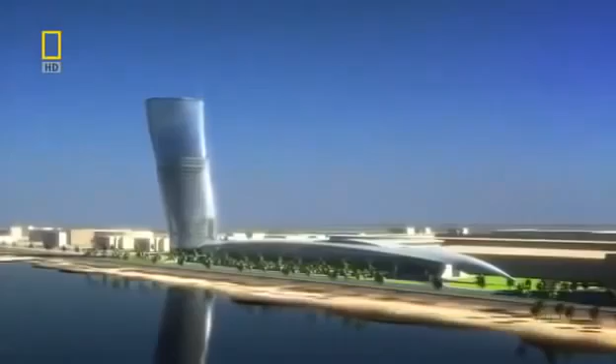The team come up with an extraordinary design. A tower that spirals out of the ground to 160 meters. Inspired by a desert whirlwind and the splash of a wave rising over the sand. This gravity-defying skyscraper tilts almost 5 times more than Italy's Leaning Tower of Pisa. No single angle of this tower is the same as another. It's a structure guaranteed to amaze.

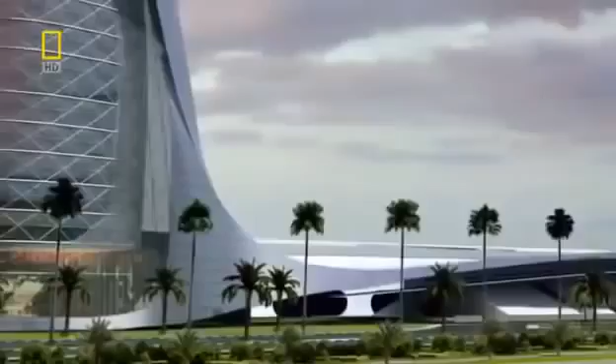We really wanted this to happen. They could see a vision suddenly. They could see something that would stand for them. Then there was no stopping us. Sheikh Sultan wants the lower floors to become the most prestigious office address in Abu Dhabi, with the top 18 levels assigned as a 5-star hotel fit for royalty.

But for maximum impact, this landmark skyscraper also needs a prestigious location. The Sheikh decides the tower will stand next to a monument of national importance, the Grandstand. Built by his uncle and founding father of the United Arab Emirates, Sheikh Zayed, it's used to this day for national celebrations. This monument and the skyscraper will link Abu Dhabi's future with its past.

Over the past 50 years, this land has experienced extreme change like no other. The discovery of huge oil reserves in 1958 set the wheels of progress in motion. Abu Dhabi's ruler, Sheikh Zayed, had a vision. To unify the sheikhdoms and secure their financial future from Western dominance. He then set about using his black gold to create a city that rose out of the desert.

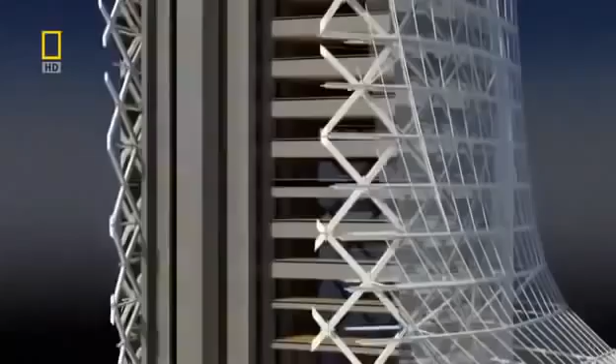To make Capital Gate's gravity-defying design a reality, it'll take some extraordinary engineering, and the challenge begins on day one. Its top floors overhang its base by 33 meters, creating huge forces that want to rip the building's foundations out of the ground.

At the construction site, project architect Tony Archibald is daunted by the task ahead. When I first joined the job, I was shown the drawings, and I kind of did a double take, and I wasn't quite sure that I got the correct understanding of the project, and it took me a few moments before I realized what we were about to undertake.

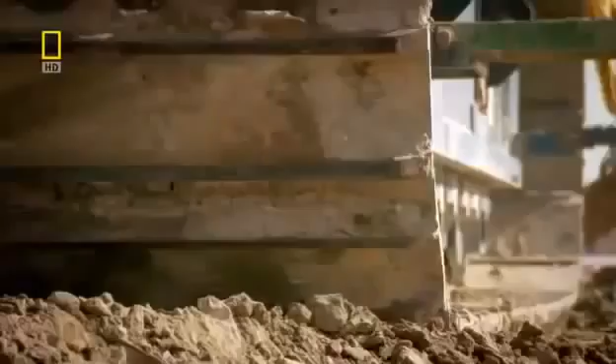Keeping Capital Gate upright is a huge engineering challenge. There isn't just one solution. To overcome the forces of gravity, it will take a whole range of pioneering techniques. But the task starts with the foundations deep underground. On one side of the building, the weight is going down into the ground. On the other side, it's being lifted out of the ground. And that's due to the large overhang that we're having to deal with.

The solution requires almost 400 concrete piles that work in 2 different ways. On the leaning side, half of the piles push the overhang's forces into the ground. On the opposite side, the remaining piles anchor deeper into the bedrock. They resist the stretching forces trying to wrench the building out of the ground.

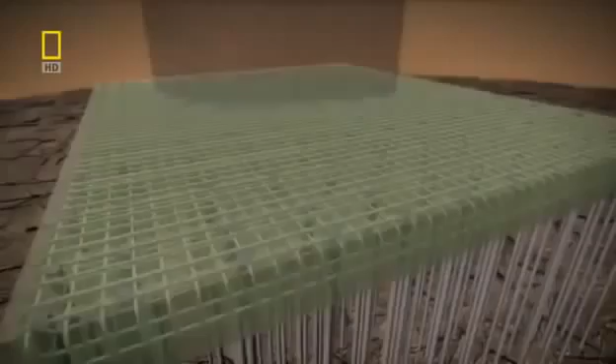Finally, to evenly distribute Capital Gate's forces into the piles, a deep concrete slab reinforced with steel is laid on top. What the foundations taught us is that every single aspect of this building has to be custom engineered.

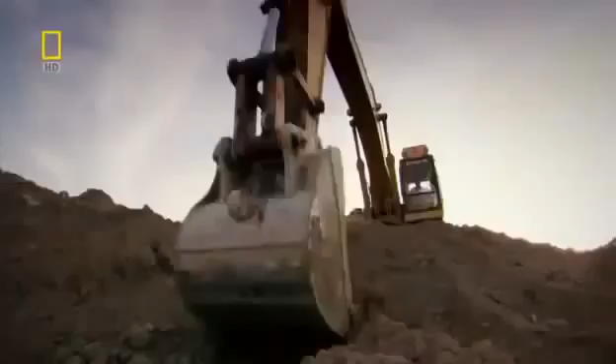Excavators dig out a colossal 6,000 cubic meters of sand. And over 8 weeks, hundreds of piles are driven into the ground. We had an awful lot of piles to put in a very close proximity. It was a real difficult challenge. There can be no let-up on this schedule. Sheikh Sultan wants Capital Gate complete by an impossibly tight deadline.

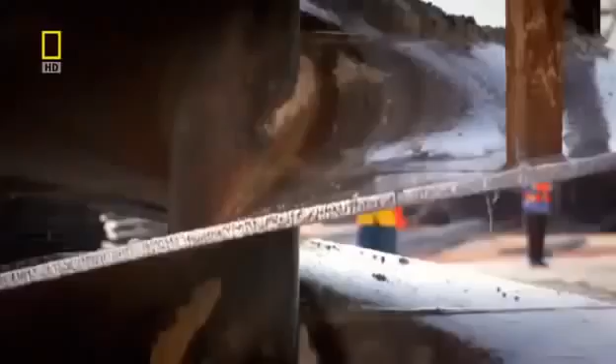With the foundations finished, building above ground can begin. But because of the dramatic lean, it will have to be constructed in a very different way to a conventional skyscraper. We realized once we'd done the foundations that this was going to be the first of many difficult problems. A normal skyscraper requires a solid core to hold it upright. But Capital Gate's curves will just crack and topple a standard core. Engineers must discard conventional thinking and devise a way to defy gravity.

Inspired by the nearby desert landscape and its wind-shaped dunes, architects have designed a curved leaning tower. But it'll take some audacious engineering to stop Capital Gate from falling over. Normal skyscrapers are built around a slim vertical core, which helps to channel the building's weight into the ground. There's so much overhang on this building that a conventional core, there was no way it was going to work. You just can't build a straight core. It's just not strong enough.

Capital Gate's design would cause a conventional core to bend dangerously. The pull of the massive overhang wants to stretch the core on one side, causing the concrete to tear apart.

Structural engineer Mona Vassi knows it's a serious problem that must be solved. When I saw this one, I thought it's impossible, it's not going to work. It's just some sketch, somebody left it somewhere. But I always think that for the architects, it's easier for them to just draw something, but it's not easy for us to fulfill or satisfy their need.

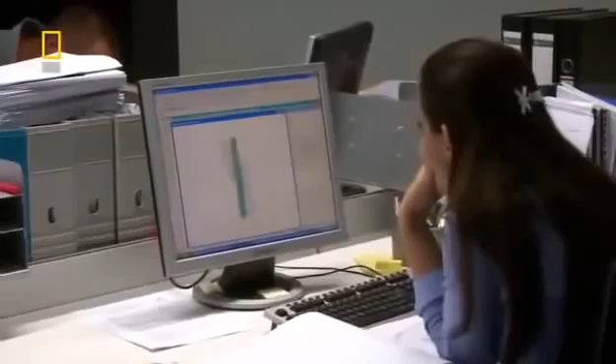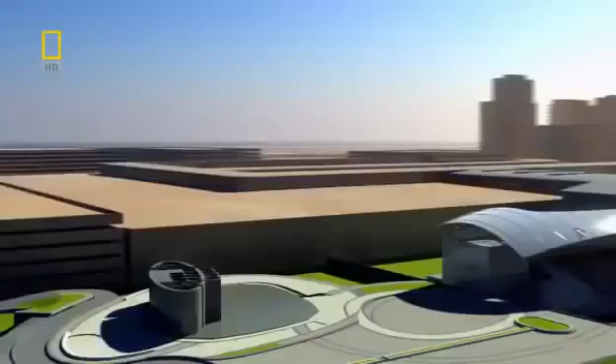The engineers developed two groundbreaking solutions. The first part of their plan is to build the core with a curve, bending in the opposite direction to the building's lean. As the structure grows, its weight pulls the core straight. In total, it shifts 350 millimeters, and the effect is significant.

The concrete that would have been stretched by the overhang's pull will now be compressed and strengthened. You build it bent, and then as you add the slabs to the upper levels, it pulls it back into vertical. So basically that whole vertical core is in compression, and that gives it immense strength.

The core grows 4 meters a week, and construction manager Les Fairchild is in charge of building it. This is probably the most complex core that I've come across. It's built at an angle, and effectively the core holds the whole building up. The core is built using a technique called jump forming.

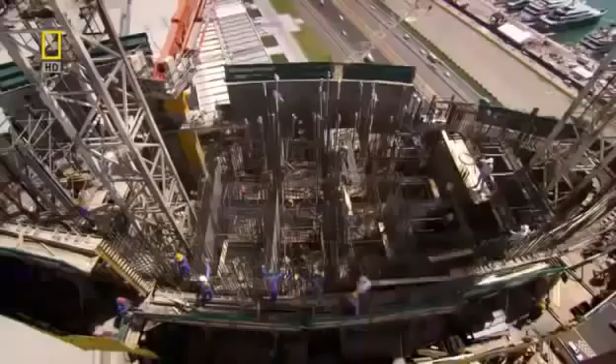First, a dense mesh of steel reinforcement is assembled. A mold then closes around the steel to form the shape of the core. The steel mesh is then filled with concrete. Then the mold or form can climb up the core wall for the process to start all over again.

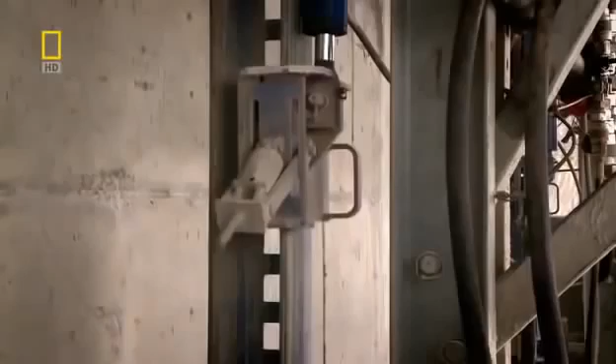Jump form is a hydraulic platform. Once we've cast each 4-metre level, we simply attach it to some runners and we jump it hydraulically up to the next level. The core will be strengthened as it straightens. But for the core to carry extreme loads, the concrete must be reinforced using steel rods called rebar.

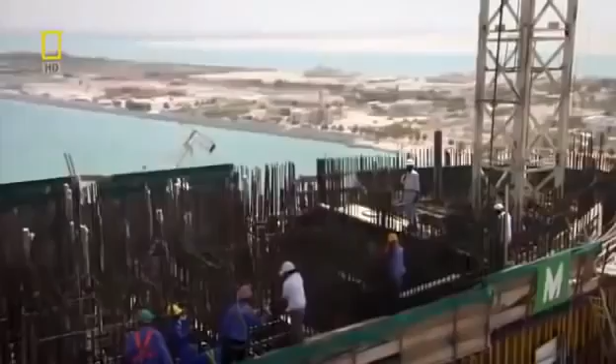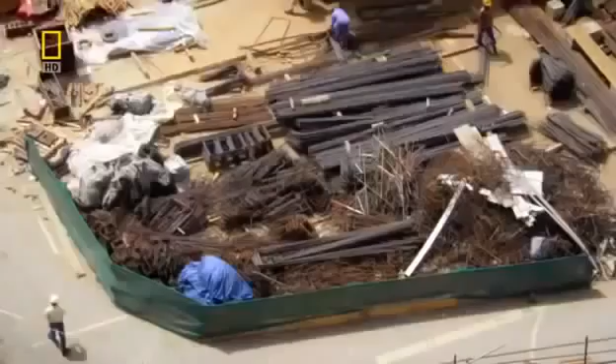The rebar is installed during the daytime, but temperatures of up to 50 degrees Celsius and concrete don't mix. It dries too fast and could crack. To set at the right speed, the concrete has to be poured during the cool of the night. As the core grows higher, the liquid concrete has to be pumped over longer and longer distances. So the consistency of every batch is first checked in a slump test to ensure it won't block the pipes.

When you first see it coming out the wagon, you can usually tell whether it's a tight mix or whether it's a loose mix, and that's what we're testing for really in the slump test. We simply make a cone, lift the cone off, and depending on how much it reduces in height, it tells you exactly what the slump is. The one we just witnessed is 215 millimetres, which is within the specification, so that's good to go.

Whilst the truck drives to the pump, Fairchild needs to get onto the core. He can take the stairs, but 90 meters up is a long climb. He knows a much faster way. Crane lift.

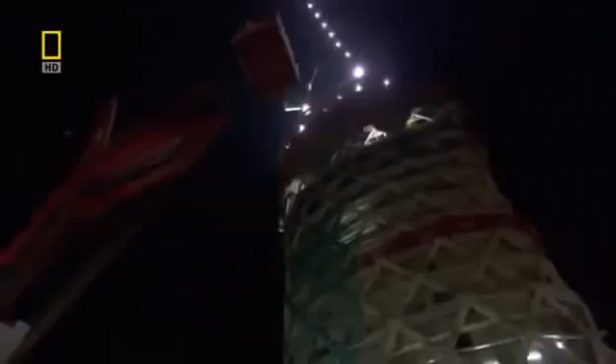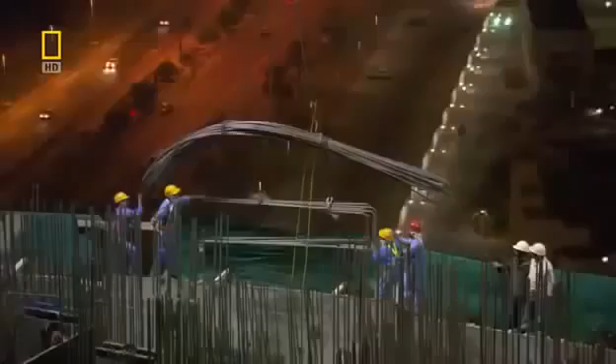It's going fairly well. We've had a nice continuous supply of concrete and we're now pumping it up to the upper levels of the building. And the lads are just steadily working away. They actually work from one side to the other in metre deep layers, so they're doing everything right. It's always exciting when we pour concrete. It means it's another achievement really. We're going up another level.

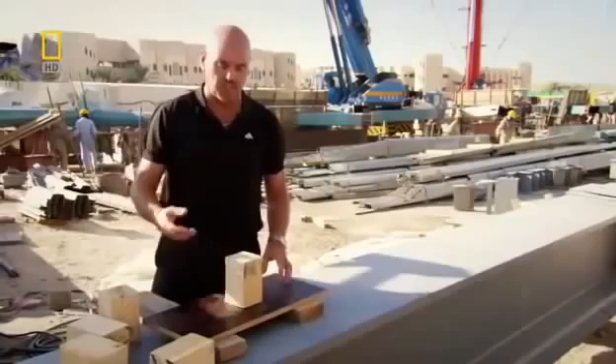But building the core out of alignment and packing it with rebar still isn't enough to stop gravity toppling Capital Gate. What we came up with is a post-tensioning solution where we introduced much more reinforcement into the core wall and then used the tensioning process. Basically that was done by introducing high tensile strands to the centre of the walls. When we reached the designated height, we simply applied tension.

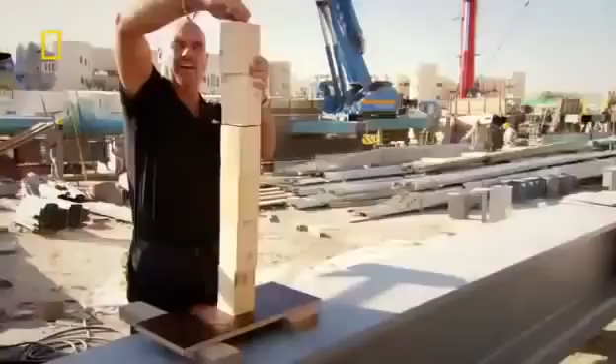We're actually stretching the tendons that fall through the wall and we're actually pulling them tight, and that's done by a tensioning machine. So effectively what you would have when the tension is complete, when the load was applied to the core, it would stay intact and the additional reinforcement would prevent it from falling over.

To post-tension the core, 146 steel tendons are threaded vertically through the concrete. Each tendon is 20 meters long and runs through 5 floors of the building, overlapping each other for maximum strength. When the tendons are stretched, the stress counteracts the pulling force created by the massive overhang, stopping the concrete from tearing apart.

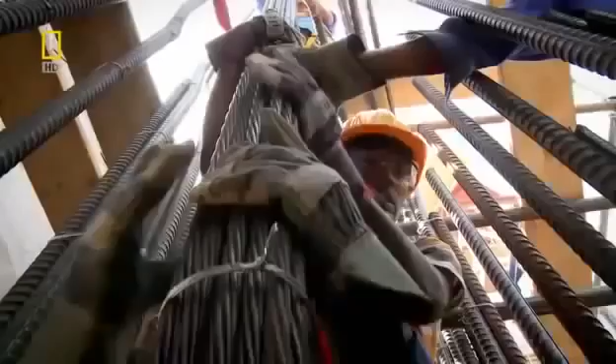On site, the team are post-tensioning the core. But no one has ever attempted this vertically in a skyscraper. The long tendon is lifted to the top of the core. The team use the steel tendon's weight to force it through a duct already cast through the core. Once the tendon is in position, the team lock off both ends, ready to tension its individual strands.

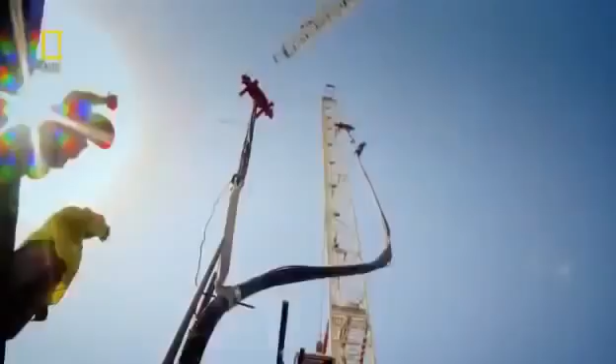A hydraulic jack clamps around one strand at a time and stretches it. It's equivalent to about 5 family cars pulling on one end of the rope. With the steel tendon now stretched to the right stress level, concrete pouring can continue upwards. The quantity of cable that's been used is approximately 120 tons and 120,000 meters in length. It's about 44 times the Golden Gate Bridge. This process is repeated over and over and means the core should withstand the huge loads generated by Capital Gate's extreme overhang.

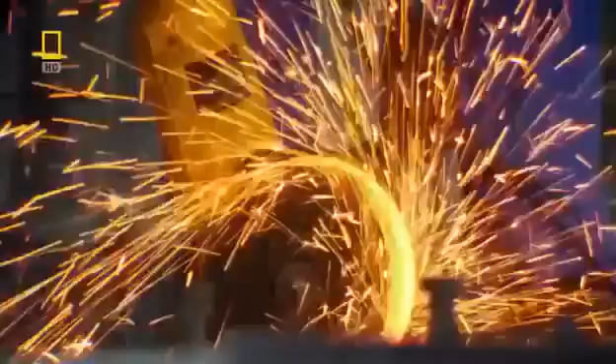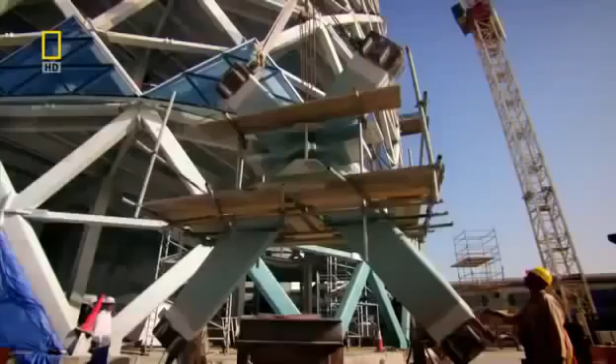But now, an even greater challenge must be tackled. The building's twisting, leaning design must somehow be turned from theory into reality. And once again, it'll mean bending the rules of architecture. To create Abu Dhabi's architectural icon, Capital Gate needs an exterior curved leaning frame. But once again, the building's extreme tilt creates a problem.

The shape of the building with this very pronounced overhang meant that traditional skyscraper building solutions just weren't going to work. There's no way. The building design requires it to be thin to maximize floor space and allow for huge panoramic windows. Irfan Ahmed is one of the engineers who has to find a solution. For structural engineers, always it's challenging to accept the architectural requirement, you know. They always want thinner and thinner and thinner.

Surprisingly, the humble chicken could help with this engineering dilemma. It is essentially a skin of structure around the outside of the building, not unlike an egg. An egg can withstand huge loads because it evenly distributes forces down through its shell, which means the shell can be thin, creating more space inside. So it's very, very thin, it's very, very strong. If I try to crush this egg, you can see that it's actually amazingly resilient. So let's see how resilient.

Here I have 170 eggs laid out, and we're going to put load on top of these in the form of breeze blocks. Moment of truth. So far, so good. Each one of these blocks weighs 15 kilos. So we've nearly got half the weight of a car on here now, on our 170 eggs. Let's see how far we can push this. That's 30 blocks, and I think it's about to go. It's going big time now. This is it. This is the end.

A diagrid is a giant mesh of steel that wraps around the core. Steel beams connect to a node or joint to form a cruciform section. 720 uniquely shaped sections link together to form the thin but immensely strong diagrid. Working together, these cruciforms equally distribute the forces down the outside of the building. The way it does that is by making a uniform net, so that the forces are very evenly distributed. And that means that we can get away with slenderer sections.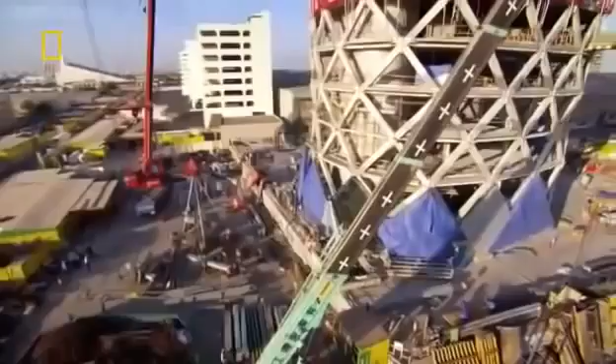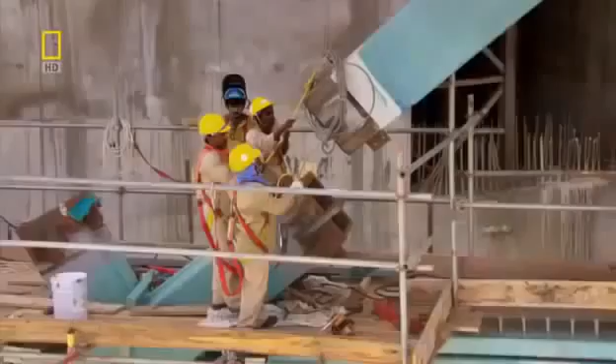On site, a team of 240 steel fabricators assemble the diagrid. They've built the easier straight part of Capital Gate's base, but now the structure is starting to lean, making installation even more challenging. Each cruciform, weighing up to 16 tons, has a unique geometry and must be crane lifted at a precise angle. If the diagrid is not assembled with millimeter accuracy, the mesh will not channel the loads and the structure could be weakened.

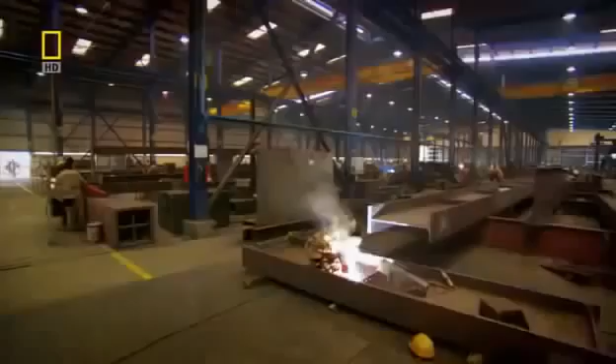The engineers must communicate closely with the expert steel fabricators. They design and manufacture the diagrid 150 kilometers away in the neighboring emirate, Sharjah. Here, cutting-edge construction is the norm. They've built one of Malaysia's Petronas Towers and Dubai's iconic skyscrapers, the Burj Al Arab and the Burj Khalifa. But Capital Gate's revolutionary design pushes even these experts to the limit.

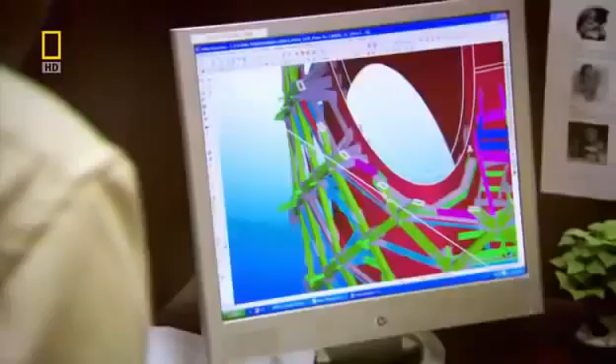On the planning floor, project engineer P. Bhaskaran and his team need bespoke 3D software to tackle the building's highly complex diagrid. The 3D modeling is done, and any unforeseen criticalities will be very clearly identified in the 3D model. Each one of the 720 cruciforms is precision engineered, not only to channel huge forces, but to connect with millimeter accuracy to the neighboring cruciforms and the glass facade. But to measure their exact angles, the team used some old-school technology: chalk. It might look unsophisticated, but it's highly accurate, ensuring all the elements will join together.

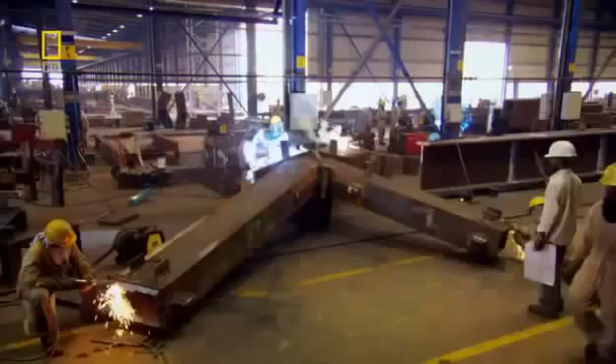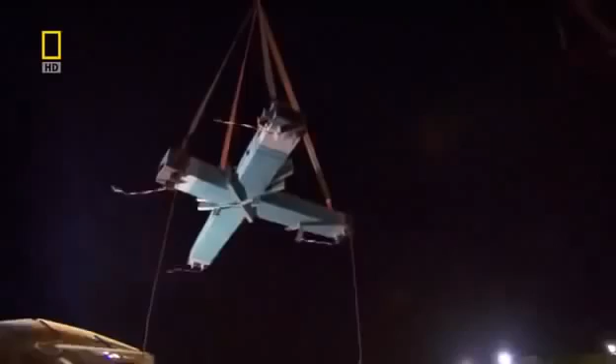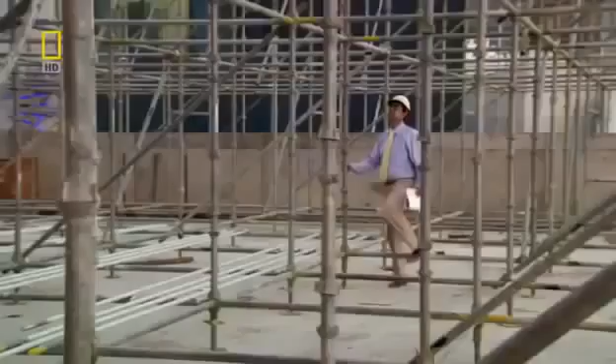To keep up with construction, the factory must produce 18 cruciforms every week. Constructing such a huge building, a critical building within the short span, without working 24 hours, it is absolutely not going to happen. As the skyscraper reaches new heights, the long hours start to pay off. This design pushes the diagrid technology to its absolute limit, and in fact far beyond what's ever been achieved so far. Even in your dreams, you're thinking about this project. So once you see the structure coming up, you forget all the long hours you spend and all the sleepless nights.

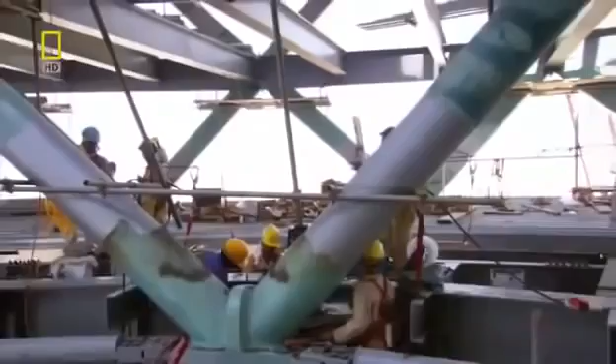A colossus is fast emerging from the Abu Dhabi sands. Now, this leaning tower must be clad with a glass facade. And as always with this gravity-defying structure, it's going to require some revolutionary engineering.

Glazing Capital Gate's leaning curved frame is a major problem. Covering its unusual contours with curved glass will blow the budget. So the skyscraper's curves must somehow be clad using cost-effective flat glass panes. Fortunately, ancient Greek geometry can help.

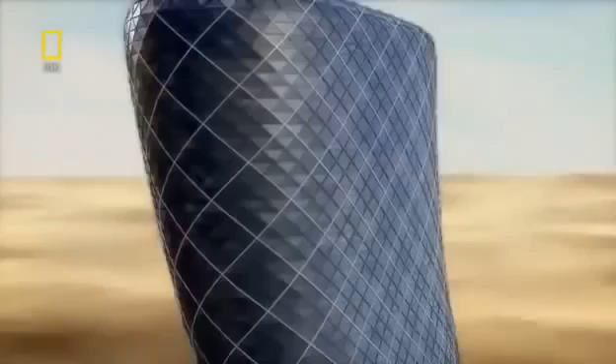Because you've got a complex shape, it's an organic shape, it's a curved shape. The only way to model that with straight lines is to use triangles. Triangular panes can pivot in 3 directions, and when joined together can cover complex geometric surfaces. But because every angle of the building is unique, it'll take 26,000 triangular panes to form the facade.

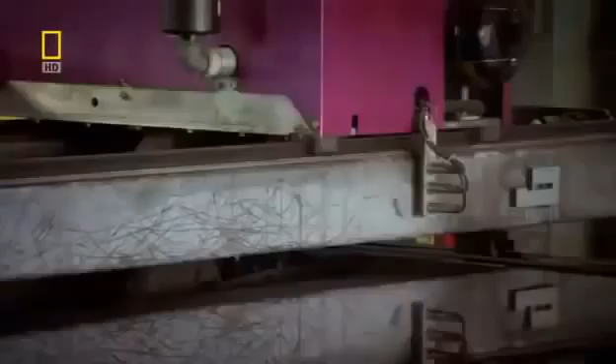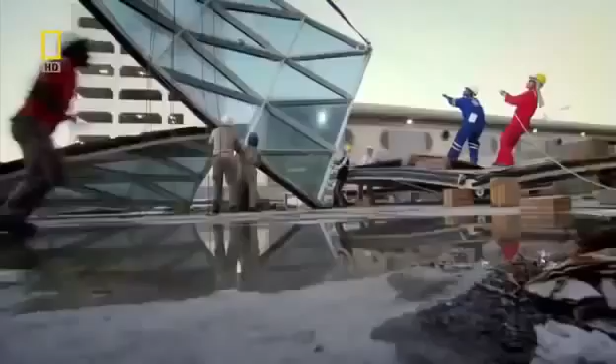With so many glass triangles to cut, the local glass factory springs into action. Each pane is scored by an automated diamond cutter to an exact pattern. The triangles are then sent along the production line. The team is under constant pressure to deliver enough glass to the site. Hey, this side, 2 guys, hold it. After several weeks, 8 diamonds are in place and another 100 standing by.

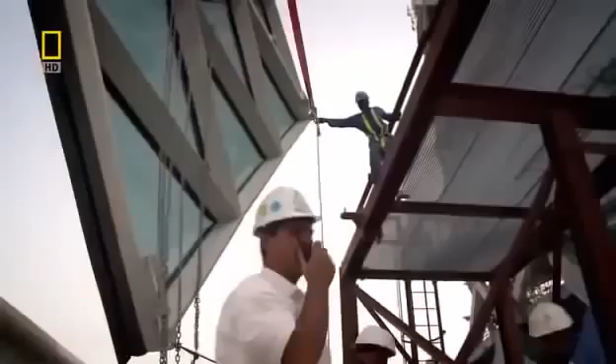But the glass design is so unconventional, it still has to pass a number of tests to prove it's up to the job. Because we'd already started the glass installation, the results of this test were absolutely key. Each panel is stacked one upon the other. So if we'd had any kind of problem, we would have had to unstack them, which would have had disastrous consequences for the program.

This is no ordinary glass skin after all. Capital Gate's core straightens as it grows. The skyscraper will not stop moving until after completion. Normal glass facades can accommodate minute movements caused by wind and temperature changes. But to stop the glass shattering and keep the building watertight, the panels must be designed to shift by up to 20 millimeters. The scale of that kind of movement is almost unheard of in glazing systems. It's a vast amount of movement.

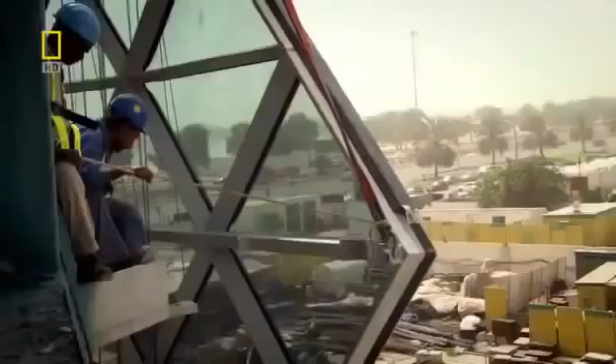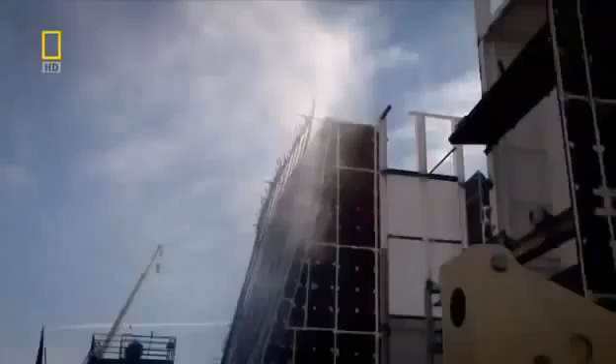With glass installation ongoing, construction manager Craig Rooney needs to know the panels will perform. We don't want to get to the top, we've done it, we've installed it, we think we've done a great job, and then it all leaks. The panels must be tested to the limit at an Abu Dhabi laboratory. A plane engine and many liters of water simulate worst-case scenario weather.

Now the moment of truth. Any leaks could be a disaster. And it's bad news. The first time we got a full water test, we had a leak. The fact that we had a leak was devastating to the whole team and very alarming. The diamonds connect to each other by a bespoke two-layer seal. The flexible spongy seal allows the diamonds to move and keeps water out. But if any water does seep through the outer seal, drainage tubes fitted at intervals let the water flow away.

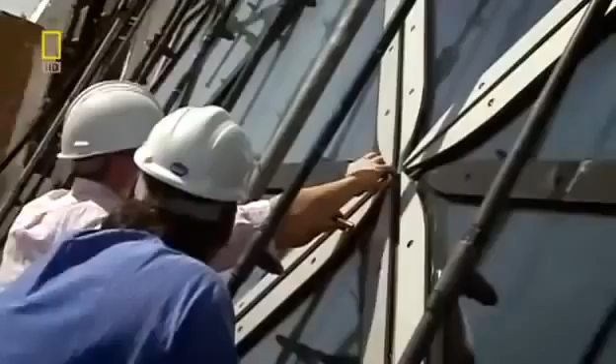The panel has failed the test. Water has flooded inside and penetrated the inner seal. If it was a fundamental failure, we're back to the drawing board, so the cost and the budget and the program all go completely out the window. The panel is examined. Answers are needed fast. Fortunately, it's not a design failure. They discover a drainage tube is only blocked with sand. The problem resolved, installation can step up a gear.

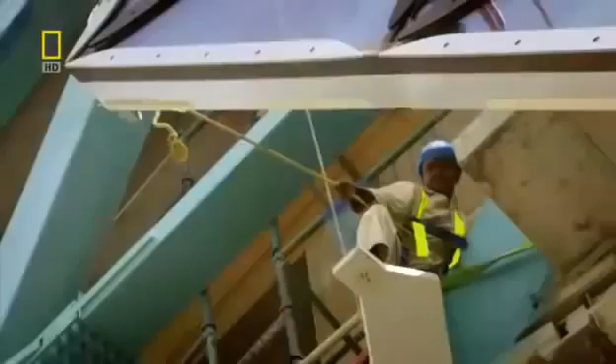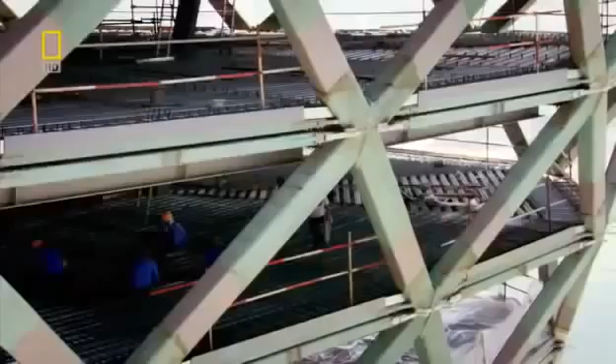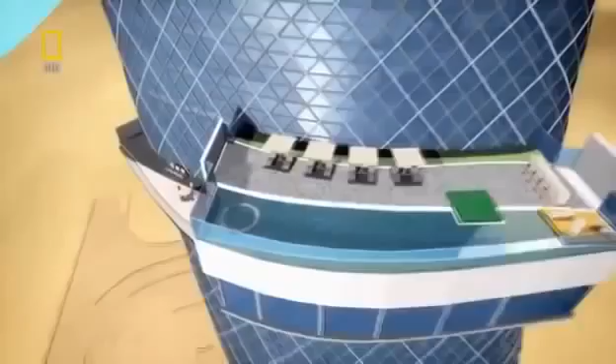But as always with this audacious building, one problem is solved and another is just around the corner. To give Capital Gate's five-star hotel lobby the wow factor, architects again plan to push the design to the extreme. Now they want to build an infinity pool and a restaurant, hanging 100 meters above the ground.

18 months into the build, Capital Gate's design is about to give a new slant on high-rise living. The architects want a pool deck and restaurant suspended in the sky, but it's an engineering headache. There's so many requirements that architects have that really put us in so much trouble as engineers, but you want to make sure you have a safe structure.

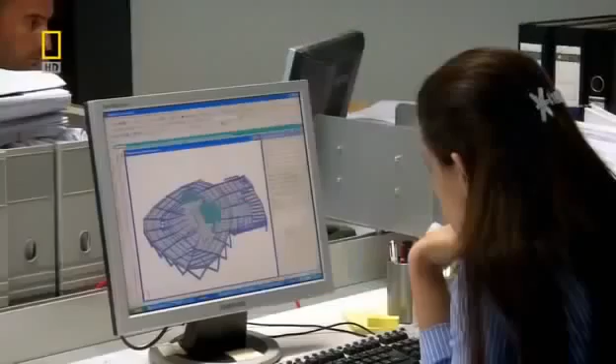The design calls for a two-story extension, hanging without any visible support. But the pool's water alone will weigh 150 tons. The structure's huge mass means it needs reinforcement. We needed some supports from below, otherwise there was no other solution. I don't think you can have a cantilever that huge on this building, no way.

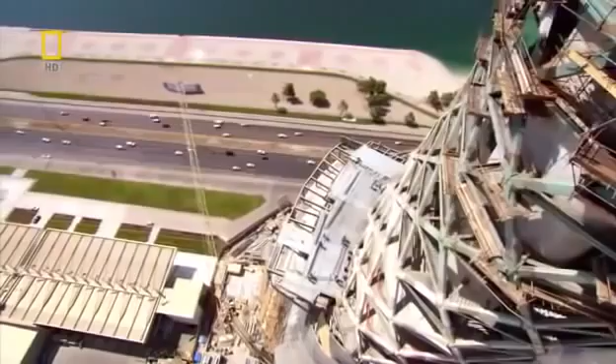The design will only work if it's underpinned with 22 steel struts. They will carry the loads back into the building. But the struts must also look delicate to meet the architect's aesthetic demands. On the construction site, 90 meters up, the pool and restaurant is taking shape. All of its structural elements are in position, except one. The team are raising its last 6-ton floor beam.

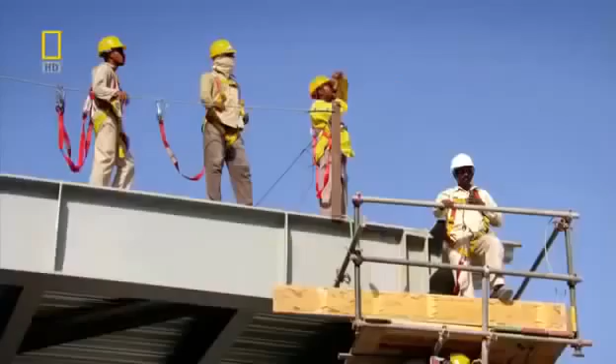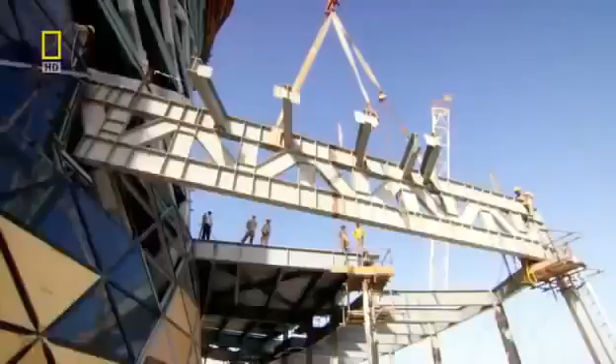It's taken many crane lifts, but one of the highest suspended swimming pools in the world has made the leap from blueprint to building. See all those lines that you just drew? They're actually drawing the same thing for you, but with a crane. But the feeling is indescribable.

And the structure's muscular struts and connections are also elegant. The idea behind these junctions is that they behave like the insects that can walk on water. They're sufficiently light that the surface tension keeps them above the water. So these little brackets dissipate the forces from all that weight.

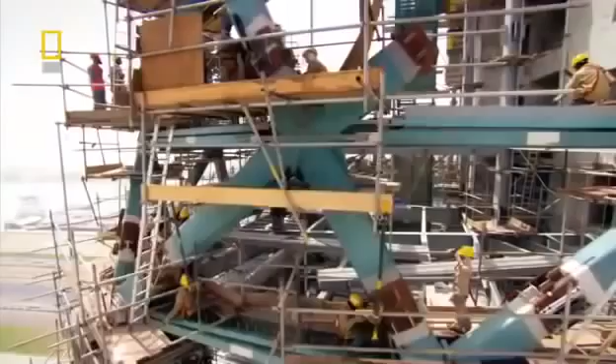Capital Gate is fast becoming an Abu Dhabi landmark. But the taller it gets, the more the weight of its upper floors is a problem. The skyscraper needs to go on a diet. And this time, the architects come up with a clever solution. The building has lots of visual surprises.

And one of the most important ones of those is the internal atrium. It's a kind of a light well that brings light from the sky deep inside the building, and it extends over half the height of the building. So it starts out very, very small at the bottom and opens out in a big funnel. This cavernous hole is good news for reducing weight and minimizes forces.

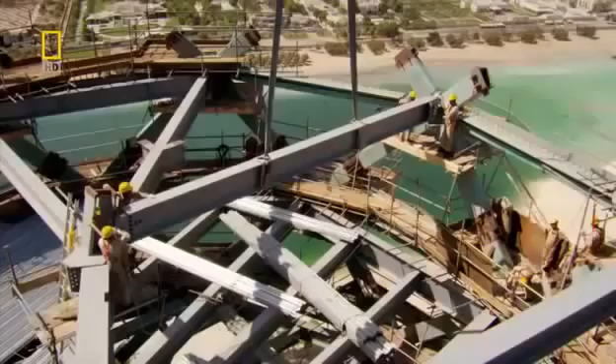But the atrium is a double-edged sword. The floors are critical in transferring loads from the diagrid to the core. A giant hole through 18 floors means these loads must find another pathway. It's a very, very big hole in every single floor plate. So our engineers really have their work cut out.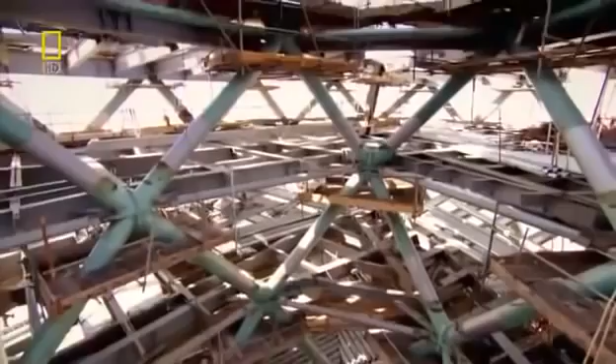You don't want to have an opening in your floor. You want to have more concrete, reinforced concrete, to transfer these forces. The forces need to flow away. And the solution is pioneering. An internal web of steel mirroring the external diagrid. This is the first time we've ever heard of this being done.

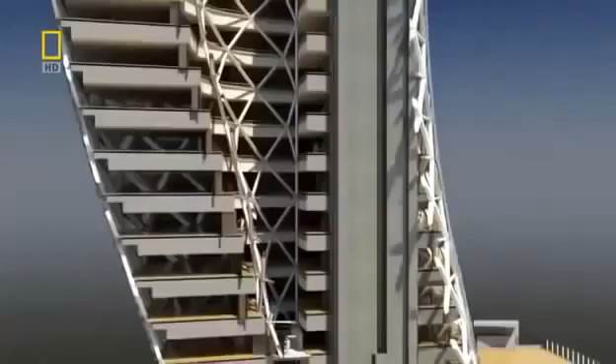The internal diagrid is actually a fundamental part of the structure. This funnel-shaped internal skeleton carries the forces of an 18-story building down to its tapered base and into the core. But the loads are extremely high for such a small area. To stop the atrium punching through the core wall, the concrete needs protection.

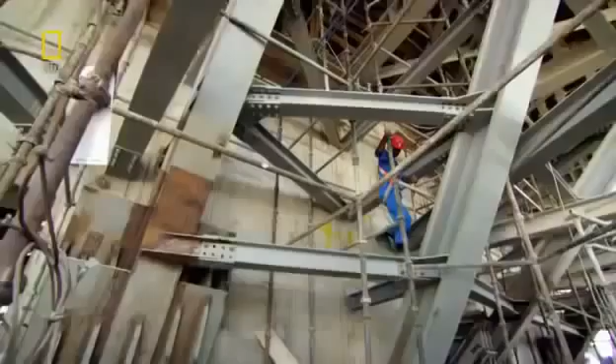The answer? 6 giant plates of steel that brace the connection to the core wall. The connections are really a wonderful, wonderful piece of engineering. They're 8 meters high. They span 2 floors, and they connect back into the core. The atrium's near completion brings Abu Dhabi one step closer to achieving an iconic landmark.

But as the sun goes down, this isn't the only celebration underway. On site, the Indian steel team are holding an annual blessing to the Hindu god Lord Vishwakarma, the protector of architects and engineers. Their livelihoods depend on staying safe, and although they use safety equipment and are highly skilled, working with huge sections of steel at height is never risk-free.

We pay our respect to God and get the blessings from the God. We do that for the safety of all our workers and for the proper completion of the job. Every trade of workers we take, the basic tools they are using on site, that has to be kept in front of God, and the workers feel that they are in safe hands. The tools are now blessed, and the steel team's morale is high.

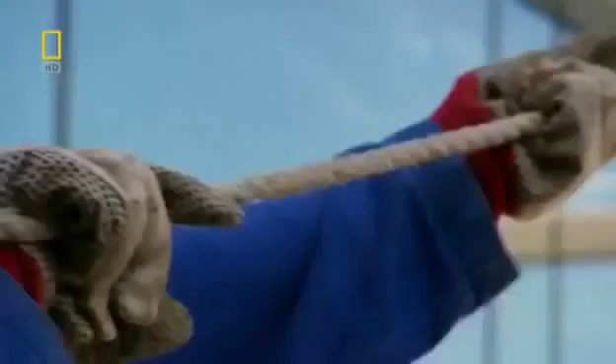But the glass installers, lifting diamonds to over a height of 100 meters, are getting the wrong kind of lift from Abu Dhabi's highly unpredictable wind. If the wind is too strong, then you can feel this in your hands when you hold these diamonds by rope. I always get nervous if I see the panel starting turning. And this makes me always a little bit afraid when I see diamonds going up and starting moving.

Meyer has to act quickly, or this 4-ton diamond could smash into the building. Not for the first time, lifting glass is delayed by changeable weather. At this rate, Meyer won't install the remaining 107 panels in time. But Abu Dhabi's wind isn't the only problem the Capital Gate team face. A last-minute design request comes in from the Sheikh's office that could have serious implications.

With just 6 months to go to completion, the Capital Gate team should be on the home straight. But those plans may have to be put on hold. I had a telephone call saying that we had to put a helipad on the roof, which I didn't think was a joke, but I was astounded that we got this at such a late point in the project.

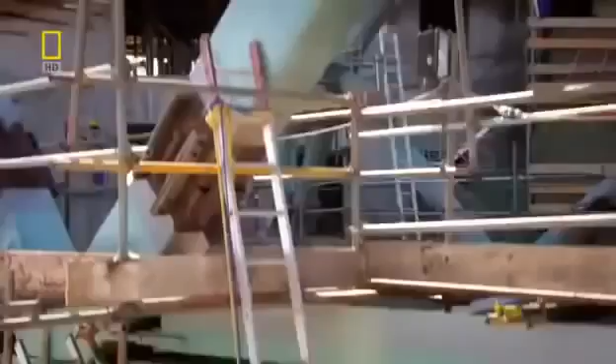Integrating what will be Abu Dhabi's highest helipad atop one of the world's most daring skyscrapers at first seems a simple request. But it actually poses 2 serious problems. It'll create new forces that must be absorbed by the already strained core, and unpredictable wind flows that can cause potentially lethal flying conditions. You get a thing called wind shear, tipping the whole helicopter onto its side. And this is a very real and very dangerous risk.

These rapid wind changes, known as wind shear, can affect the lift on helicopter blades. Aircraft can be blown off course, or literally fall out of the sky. There is no way that we could have any margin of error on the safety. The only way we could predict what the wind shear would be like on the top of the building was to model it in a wind tunnel.

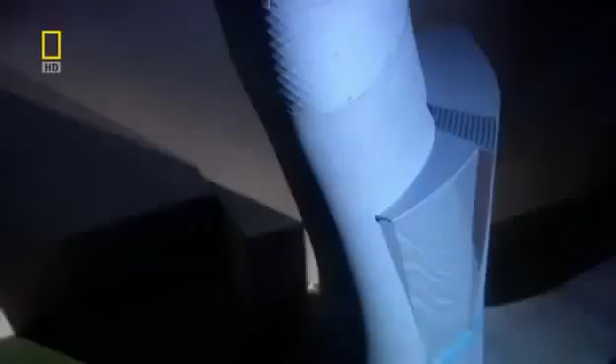In London, England, a scale model of Capital Gate is put through its paces in a high-tech wind tunnel. Just as the team fear, within seconds, wind shear conditions appear. Air currents are flowing over the top of the building, but then separate from the surface, spiraling inward to form a realm of turbulence.

Wind engineer Leighton Aurelius knows the consequences could be serious. If the pilots lose control in this random ball of energy here, they may in fact end up crashing onto the helideck, or even worse, onto the tower itself. ensure that can't occur. But that's not all the wind tunnel test reveals.

Wind impacting the helipad is also creating huge suction forces. We're talking about very large forces here wanting to pull the helipad off the top of the building. Something in the realm of several large trucks or big rigs trying to pull this helipad away.

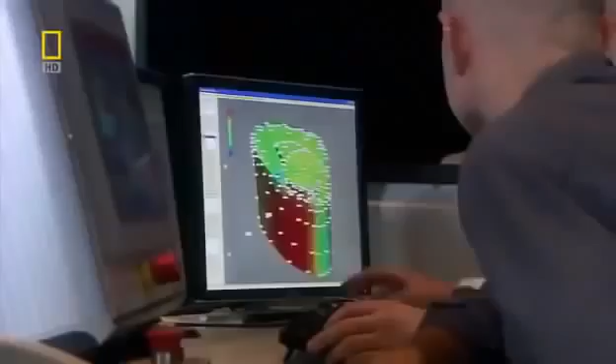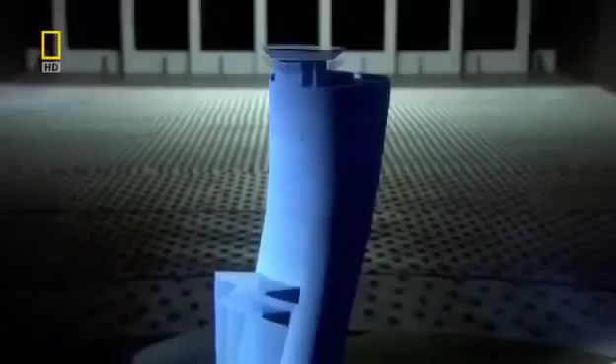To make the helipad safe, Aurelius and his team have to go against conventional thinking. We didn't think that lowering the helipad was actually going to be the optimum design, but we see reduced loading on the helipad as well as safer conditions for the pilots to land in. Lowering the helideck to just 2 meters above the roof dramatically decreases the wind shear threat, and means Capital Gate's core will withstand the additional loads.

We're relieved, frankly. The tests have actually confirmed now that we can have it in our original design position, which is very low, which will mean that the profile on the skyline is exactly where we want it. But it'll take another 5 months to just draw up the helipad's blueprints, and a crane must be left behind to build it.

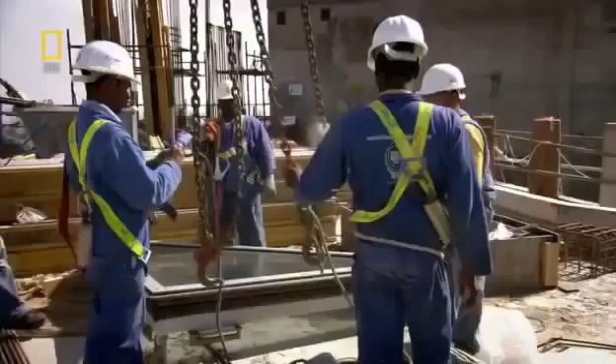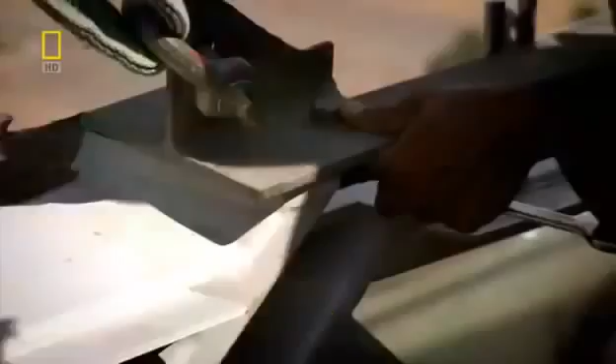Now, with only weeks to go until zero hour, the team are installing one of the last glass panels. It's a moment that once seemed a long way off. In my office I have a plan of all the diamonds we have to install, and in the beginning it looked like I'm in jail and I'm marking the wall with marks for each day. And so at first I felt I will never finish this project. Just 10 months since the first diamond was fitted, the facade now shimmers in the sun.

Capital Gate's internal fit-out will take another year. Only then will its 5-star hotel and Abu Dhabi's most unusual office address be open for business. But against the odds, the team have created one of the most extraordinary megastructures on the planet. Capital Gate twists and spirals out of the ground, soaring to a full 162 meters. It's taken nearly 6 million man-hours to construct, and its overhang is spectacular.

You see the building and you stand underneath the overhang of it. It's extremely impressive. It's a fantastic feat of engineering. I feel as though I've been here an eternity, but it's probably been the quickest 2 years of my life. It's been an amazing journey and we've learned so much. And actually I think we've demonstrated that some things that looked impossible or even ridiculous were actually possible.

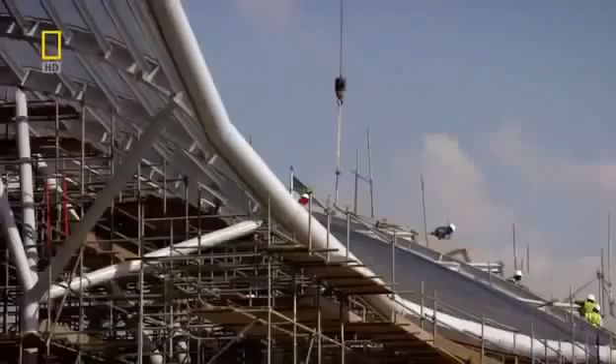And Abu Dhabi's past will soon be physically linked to its future by a wave of steel that'll rise over the grandstand and splash up the skyscraper's mirrored glass. Abu Dhabi is a fascinating part of the world to be at the moment. It says to people we can step outside of the box. We don't have to follow the rules.

With the 2010 World Future Energy Summit just weeks away, Sheikh Sultan can be sure Capital Gate will show the world what Abu Dhabi is capable of. This building is really iconic. It catches the spirit of Abu Dhabi and will be part of the postcard image of Abu Dhabi. The team have achieved what some thought was impossible. A leaning tower that claims the world record for the most inclined skyscraper on Earth.